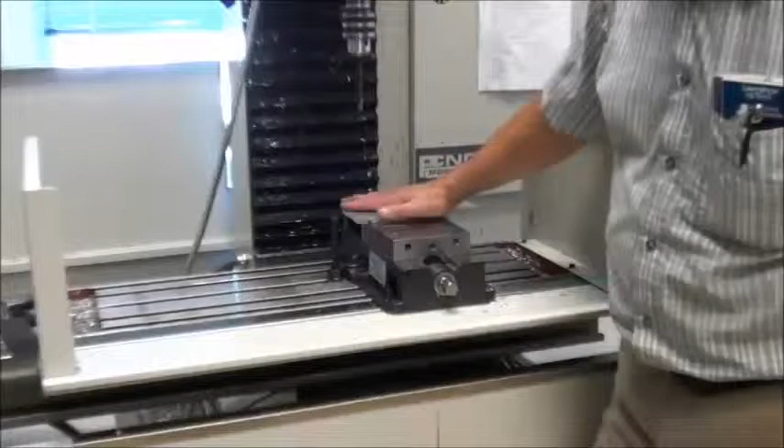So let's go through the zeroing process. First thing, I just got a drill here. I need to change that drill. So I'll show you how to change tools, and then once we have the appropriate tool in here, we'll show you how to zero that, and away we'll go. I'm going to bring this down just a bit for convenience.

Changing the tool, there's a latch on the side here. Unlatch it, open it up. This has a pair of flats, and there's this arm here that will engage those flats. That keeps it from turning. Now I can loosen up the lock rod. If I knew where the wrench was, there it is.

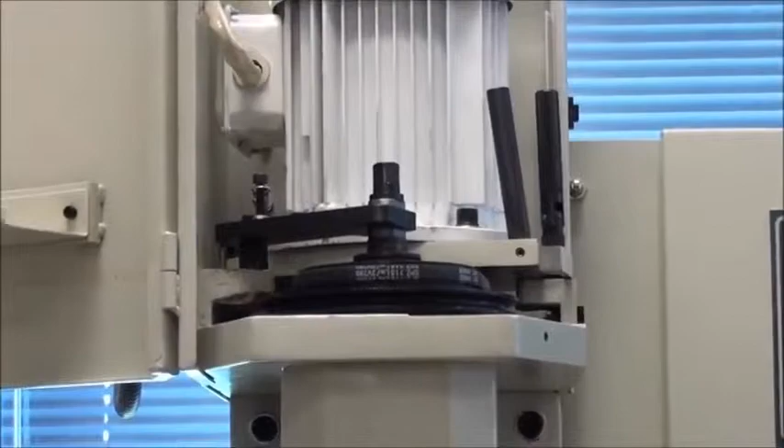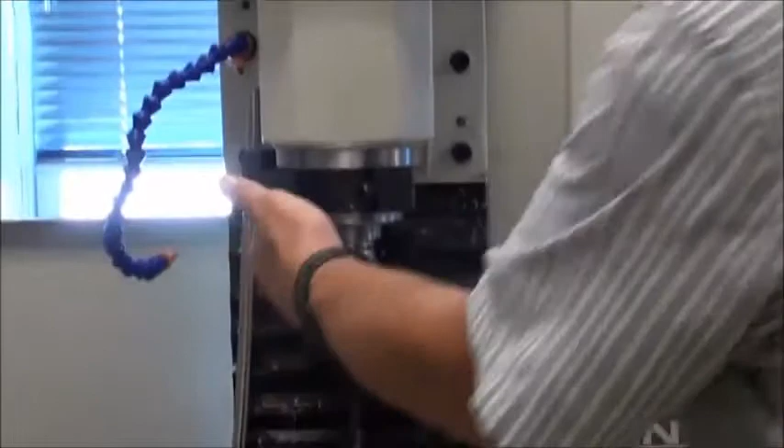One thing, when this comes loose, depending on how tight the last person tightened it, if it's not real tight, as soon as you loosen it this can fall out. When this falls out, it's going to land on something. You can chip the tool, you can dent my surface. Neither one is good. So one hand on this, the lock is engaged. I will loosen it up a bit.

Now in this case it's holding okay, so I will take my screwdriver, give it a tap, and I should have been holding it better because I bounced it off my aluminum there, but that's the way to get it out. Too busy talking and not thinking. Okay, so that's getting the tool out.

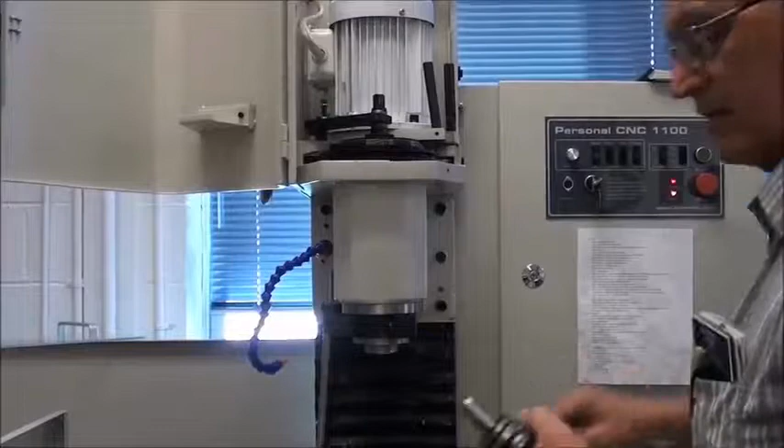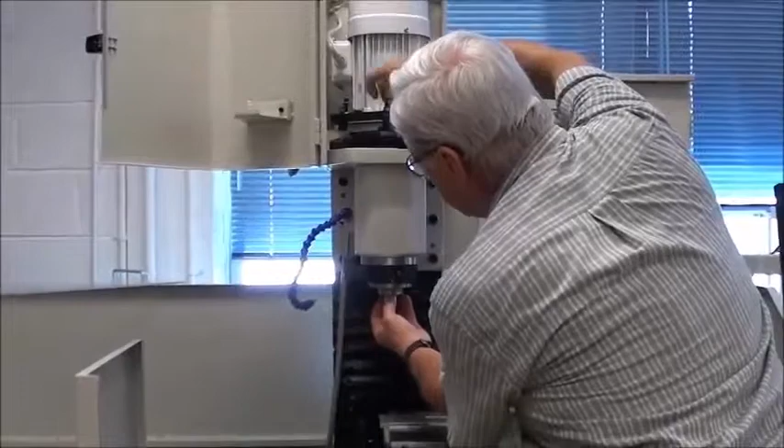And what this tool goes into, let me just open this up here, okay? I'll unscrew this. There is a collet in here. And the collet has a taper, and as you draw that in through this threaded hole right there, when you tighten that nut on the top, it compresses that collet and squeezes in on the tool, whatever tool it is.

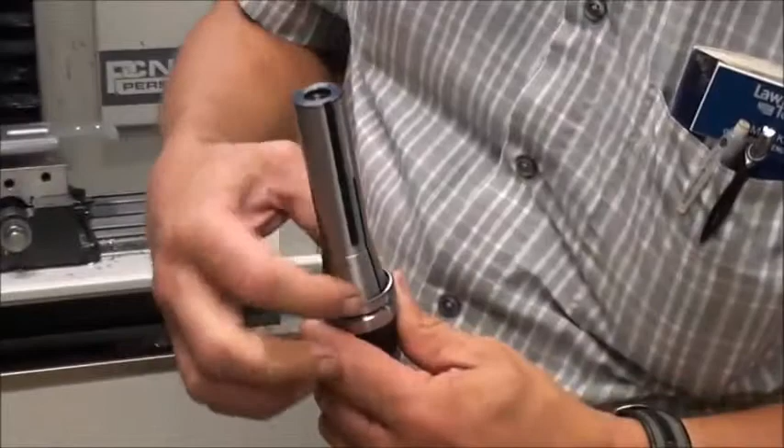And for these tools, the tool just slides in there. It's got a surface here that will butt against the bottom of the spindle, so I know the precision location. So that holds the tools. Another way to put tools in here would be to use the appropriate collet with the right size hole for the particular tool. And there's an assortment of collets around that we can do that with.

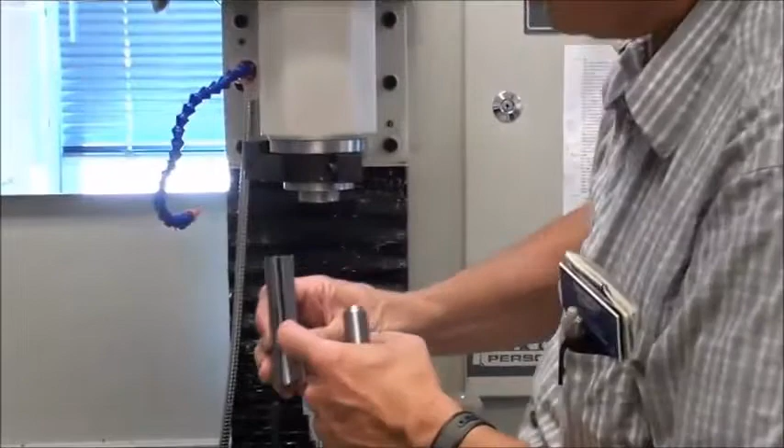And this also has slots so it doesn't turn. So as I put it up in here, I'll spin around, find that slot, I can push it up, tighten the nut, but I can take my tool, it goes in, I hold it up tight, tighten this down, it's good and tight. Now the tool is locked into position.

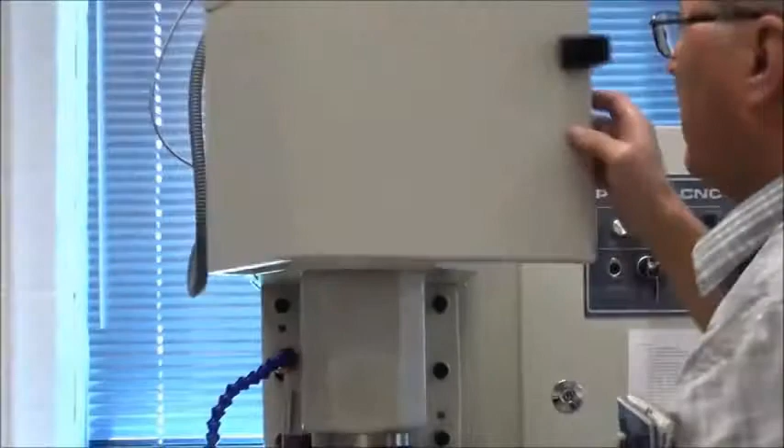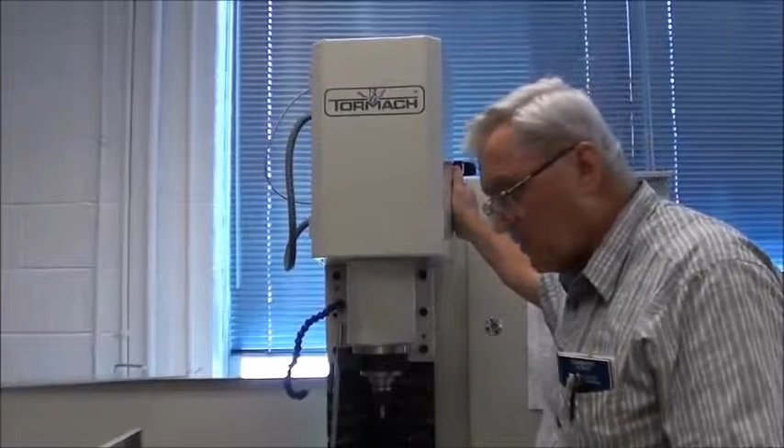I can flip this out of the, well, if I fail to flip that out of the way, when I go to close it, it doesn't close properly. If you get to that point, don't force it, right? Something's wrong. If something isn't working, stop and think. So what we need to do is just move that out of the way. Now it closes nicely. Here, I can latch that, okay?

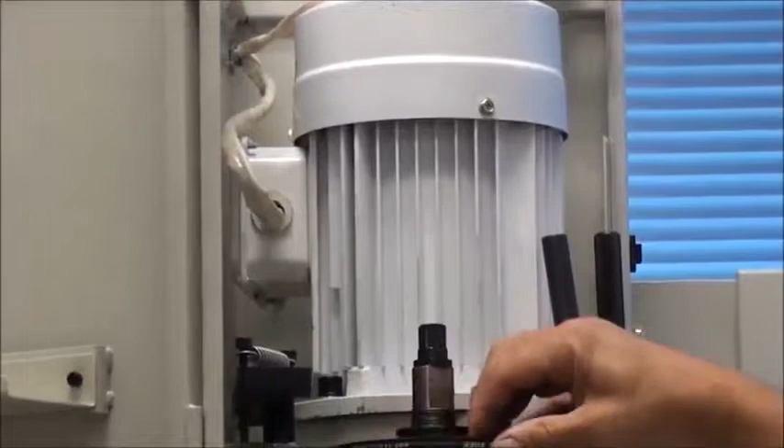One thing while I have this open. There are two pulleys here, and there's a sticker up here which you can't see in the camera now. There's a high-speed range that runs with this up here. You command speeds from 250 to 5140 RPM. If I need to change it, I can flip this lever down, flip that down, loosen that bolt. I got slack on the pulley.

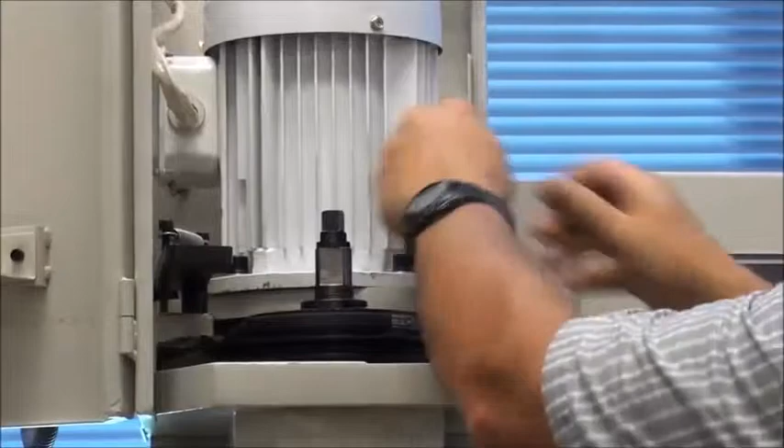I can put the belt on the other set of pulleys, and it's easier without a wrench in my hand. Tighten it up, tighten that up, and that would put me in the low speed range, which runs from 100 to 2,000 RPM, but for now I'm going to leave it in the high speed range. Turn things the right way and flip those handles up, and we're good. Okay.

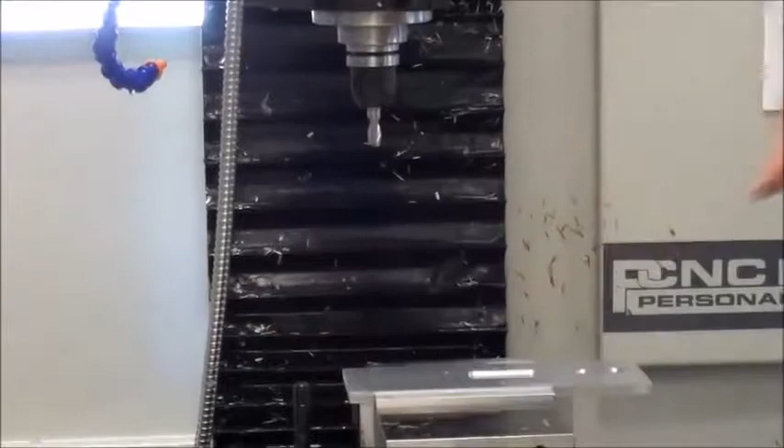So now I've got the tool that I need. The machine is referenced, so the machine knows where it is. What I need to do now is find where this part is in reference to the machine. So I've measured the diameter of my cutter here. And if I move it down so it's just touching the edge, I know that the axis of the spindle is 1/2 cutter diameter away from this edge. And then I know where the edge is. Okay? And we're not going to just jam it into the edge.

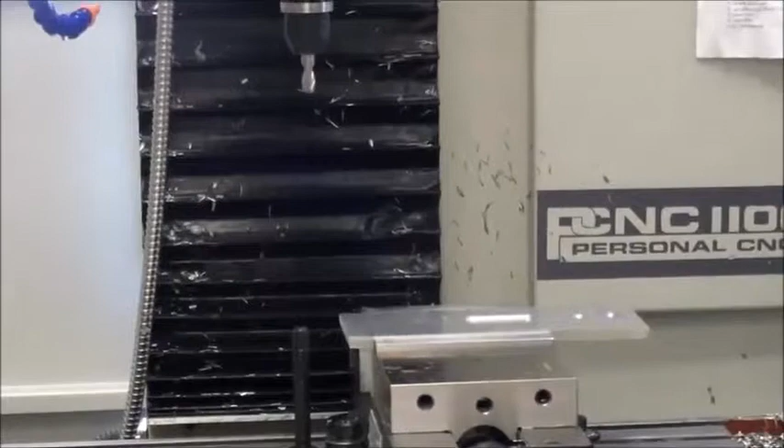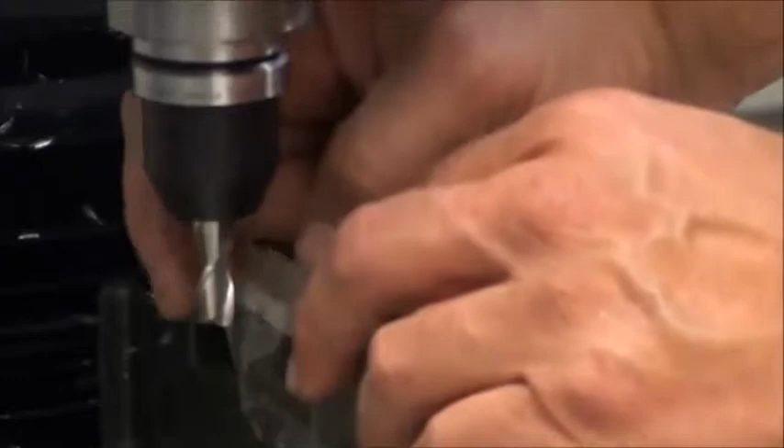Helps if I go the right way. Come over near the corner where I want to measure, and I'm going to take a Lifesavers wrapper because I happen to know that this is 1/1000th of an inch thick, and I can put it in here as a feeler gauge, and then when this gets close enough to touch, I'll be able to feel that as I wiggle this, and that'll tell me that I'm 1/1000th away from touching.

So I can move this fairly quickly in to get close. Now that I'm close, I'm going to use my pendant here and I'm going to click on the X button, set in the X direction. I'm going to move it slowly, slowly, slowly. Now I'm getting real close. Now I'm going to use the jogger, just move it one step at a time. You can hear it clicking. Each one of those steps is 1/2 thousandths.

And I'm wiggling the cellophane, and at some point you should get, it's touching. I can feel the drag. If I go one more step, 2 more steps. Well, now it stays there by itself, I think. Barely.

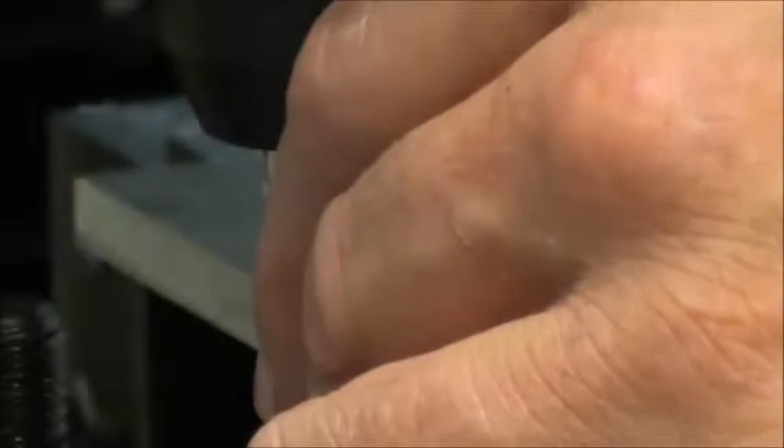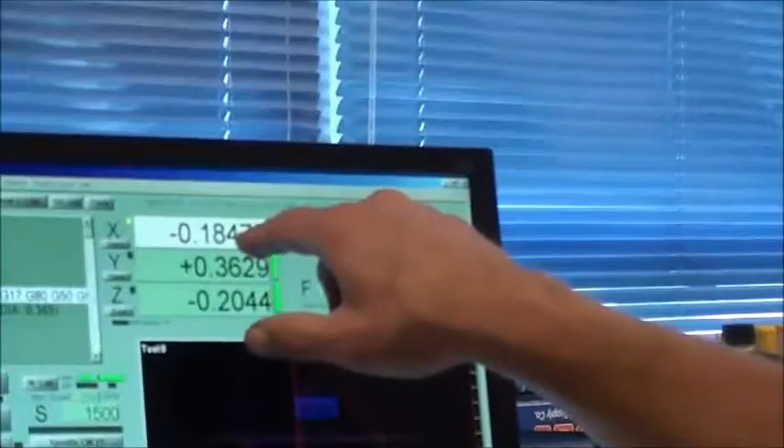There it is. Okay. It's now just tight. I can't get it back in here. Okay. So that was just touching. So now this cutter is 1/1000th of an inch away from that surface. The diameter of my cutter is 0.1875, and I just highlighted this readout here, and I'll hit enter, and now it's set that as a position of the cutter in the x-axis.

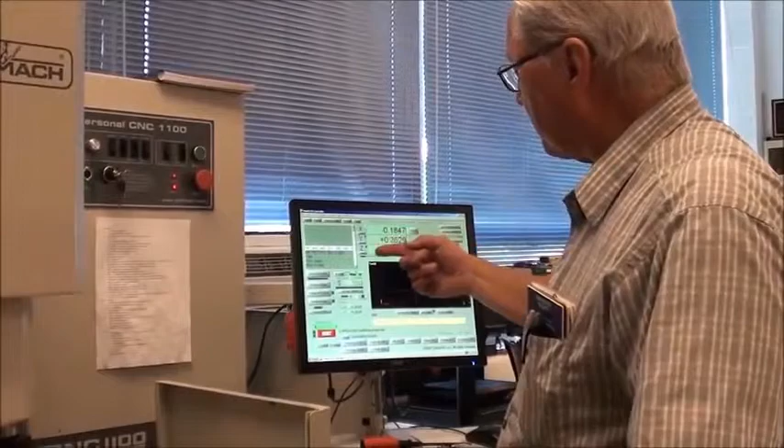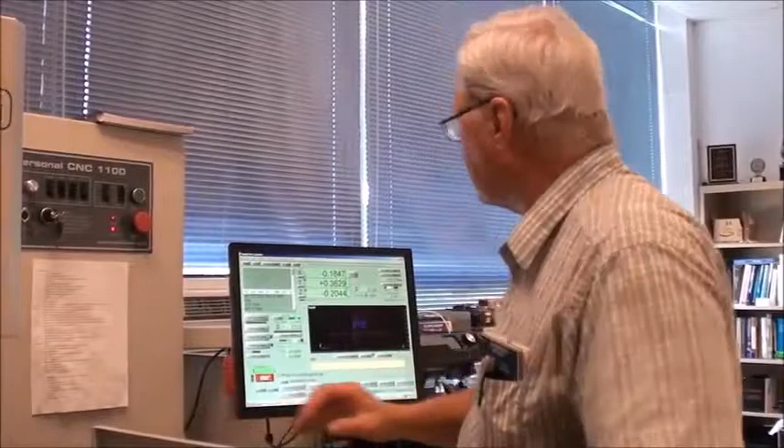Okay, these fields here on the screen tell me the position x-axis, y-axis, z-axis, and they're relative to wherever I've set an offset. These are called digital readouts. Back in the olden days when you didn't use a computer screen, well, not the olden days, the medium days, you would have digital readouts up above your machine. In the olden days, everything was done with graduations on a dial, but people still refer to these as digital readouts or DROs. If you read the manual for this, they'll use the abbreviation DRO everywhere, and it just means digital readout, and it just really means a field on this screen that you can type something in.

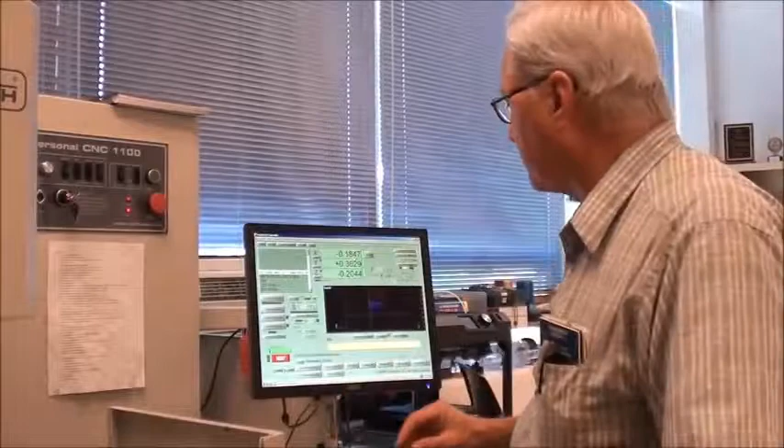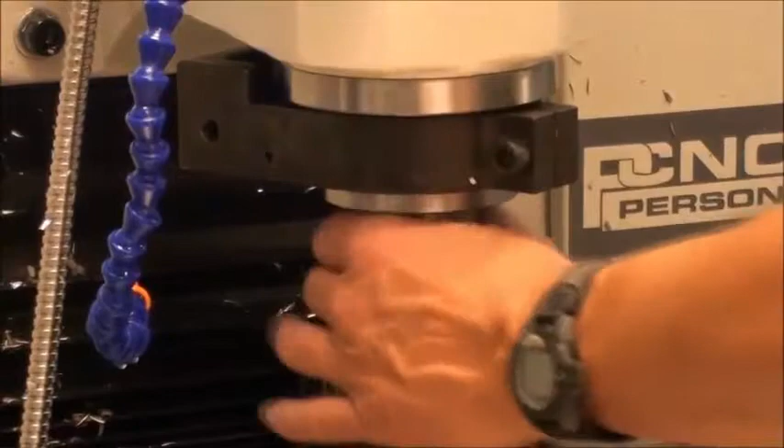So anyhow, I know where I am in the X. I'm going to go up to clear my part. Now I can find Y using a very similar process. I'll move this over. Back down. And I want to make sure that I've got this turned so that I'm feeling the edge of the flute and not in a valley. Put my cellophane in there. I move it in fairly quickly, start, and then I'll move it slowly with the pendant.

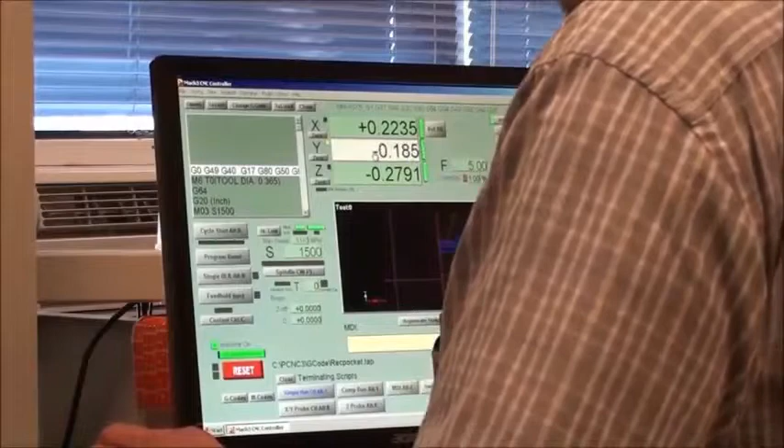I'm getting close. Okay, now it's tight. I just touched. So I'm going to back it out a little bit. If I touch it going slowly, we're okay. If I bring it into the part going full speed, I'm damaging things, and that's not what I want to do. So I'm going to step it in here, and there it is. It's just now tight. So that is minus 0.185, right? to add that 1/1000th for the cellophane.

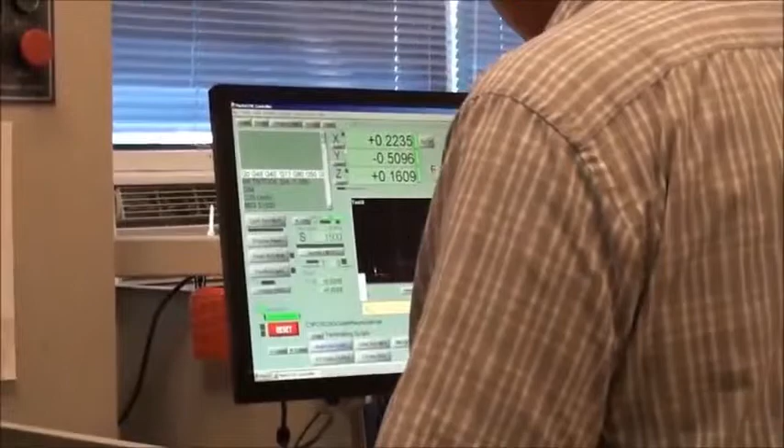Enter. And I forgot to do that extra thousandth when I was on the other axis, but that's not important because it's just a random piece of scrap and we're just putting a hole in a random place, okay? So now I've got the part mounted into the machine, it's mounted flat, it's mounted square. I found this corner. If I bring the page up so it clears, I can type commands in here. I want to X0, Y0, send it to the 0, 0 position, and it's moving at whatever the last feed rate we used for anything was, and we'll talk about that in a minute.

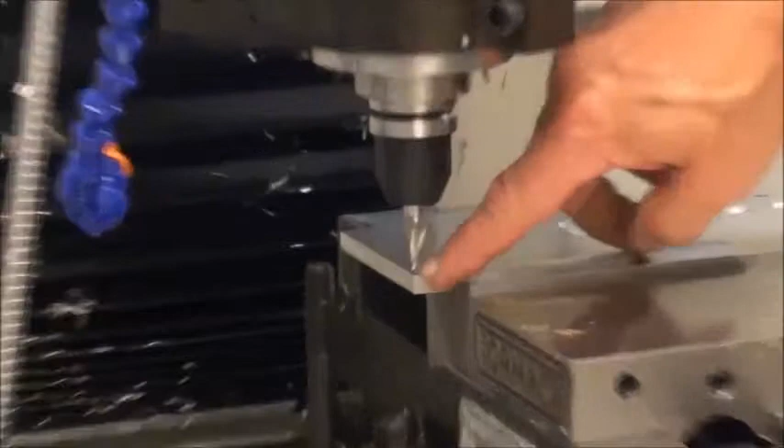So the center of this cutter should be exactly centered on that corner, okay? And it looks pretty close. It's always a good double check. If I knew the exact dimensions of my piece of metal, I could go back to this side over here. Hang on. And I could bring it down and touch it off using the same process, and I could compare the result from moving it over with my known part dimension and know that I didn't goof up the first time. That's a good double check, okay?

One more dimension to set. Let me give myself a little clearance. I can move it over. Too far. I need to set the height. I could do the same thing with the cellophane, okay? But this cutter is sharp. See that Band-Aid? That cutter is sharp. That's the reason there's a Band-Aid there. It tears the cellophane. It doesn't work as well. So what I'll use is something that has a known diameter, like this rod.

And if I can roll it underneath freely, I know I'm above that diameter from the part. If I go down, and I don't roll it while this is going down because I don't want to jam it down onto that part. Okay, now this doesn't roll underneath, okay? So I know I've gone too far down for that distance. I can use my pendant, click on the Z, I'll send it in the plus direction till this rolls.

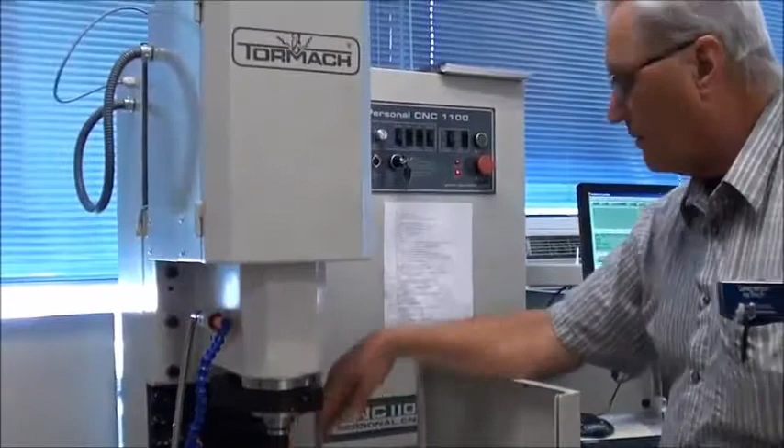The thing is, because this is a stepper motor and not a commanded thing, every time I click it, it does a command, but any backlash or hysteresis in the ball screw mechanism means there's lost motion. So that was going up. Let me go one more up. Okay, so now I can just go underneath. I can click it down one, and it still goes underneath just about the same.

Another one, another one. So there's just a couple, like a thousandth or less of hysteresis. But the bottom line is I like to find this touching point as I'm moving down, so if there is any hysteresis in this, it's accounted for, because when I'm drilling, I'm going to be going down. I can just feel it, just nicking as it goes past.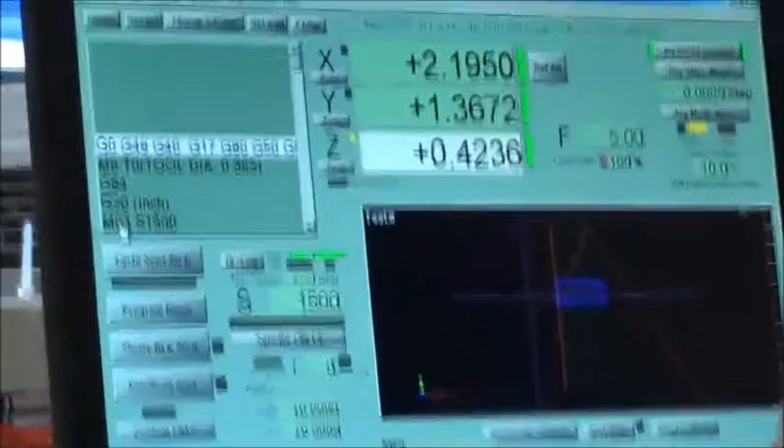So what I will type into the z-axis here is the full diameter of this, obviously. That is 0.4236. Enter, and I don't have any cellophane, so I don't have to allow for anything like that. So now I know where my part is in the X direction, the Y direction, and the Z direction, and now we're actually to a point we can start thinking about making chips.

Okay? You ready? 3, 2, 1, go.

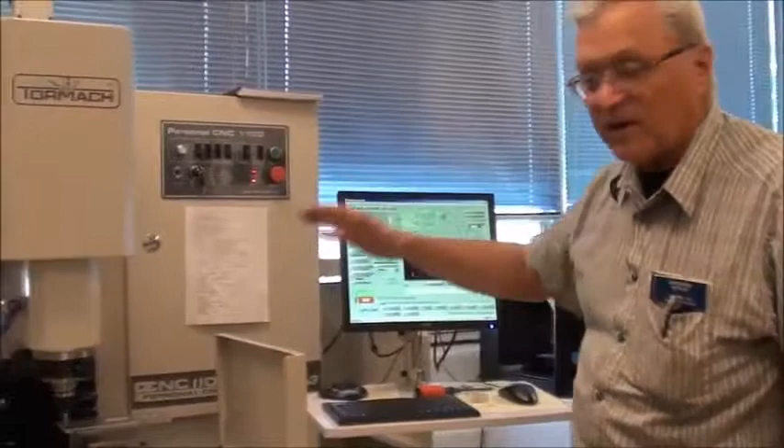Okay, welcome back. So at this point we've talked a little bit about safety. I will remind you there's no more important safety device than what you got between your ears. You got something there, let's use it. If something doesn't feel safe, then it's probably not, so don't do it.

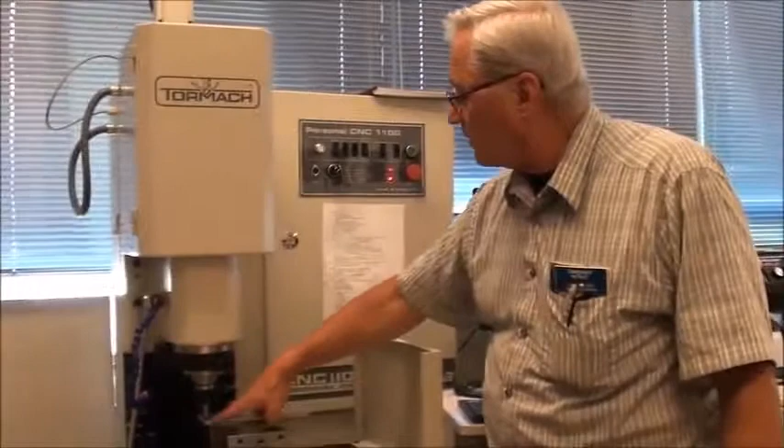We've got the part in the machine, we've got the machine zeroed, we know where our corner is, we've found our axes. I've got this very corner of the part set to be 0, 0, 0 in terms of the top corner there. So given all that, we're actually in a position we can start thinking about making a part. So what are we going to do? Well, there's a lot of different ways we can do this.

We can move the machine manually, just like I was using with the keyboard and the pendant, and machine things manually. We can draw a part in SolidWorks or AutoCAD or CATIA or anything like that and come up with a surface drawing, and then we can put it in a tool like EdgeCam. EdgeCam will create the tool paths around that surface that we need and finally create the code that we need for this machine here.

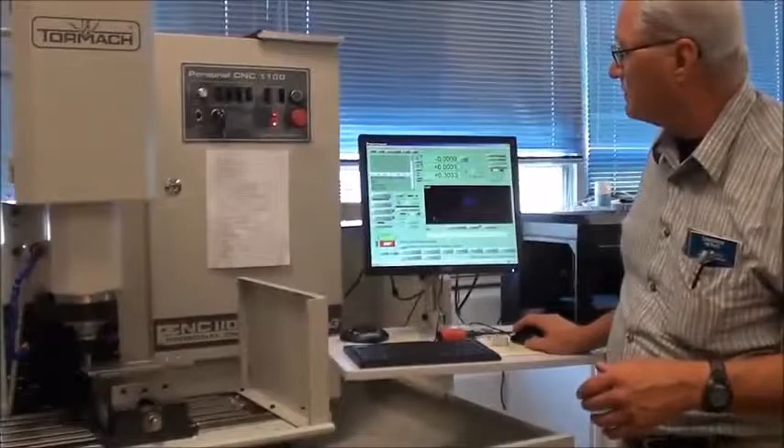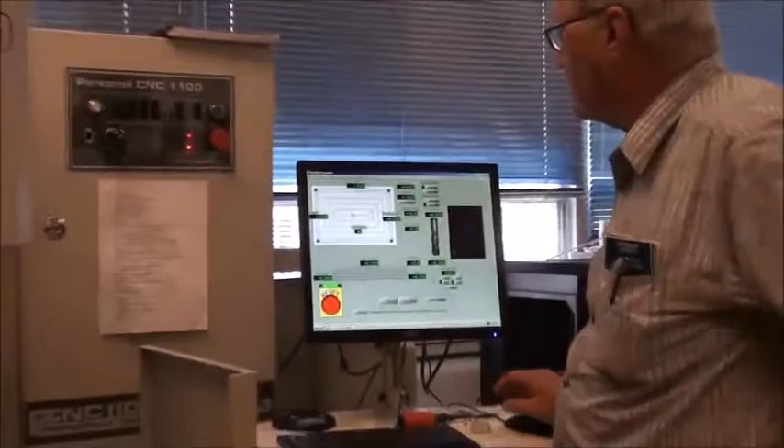Or for this example, since we're just kind of showing you how things work, this machine does have a lot of what they call wizards. I click wizards, pick wizard, and I'm going to go down here to rectangular pocket. So basically it's just a recessed pocket, rectangular in shape. And I can specify a number of things here. Let's walk through them. I got a width and a length. The width is in the y-axis, front to back. Here it's 1 inch. Length is 2 inches.

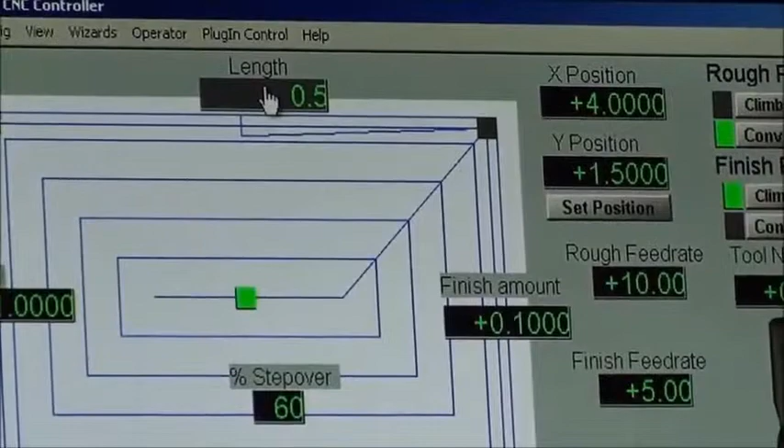I could make this 2.5 inches. Let me retype that. 2.5. And I have to hit enter for it to stick. If I just type it and move on, it doesn't stick in these things. So now I'm going to create a pocket 1 inch by 2.5 inches.

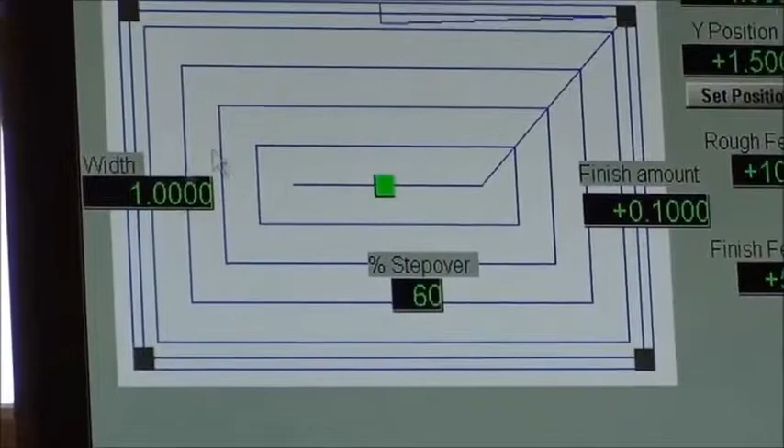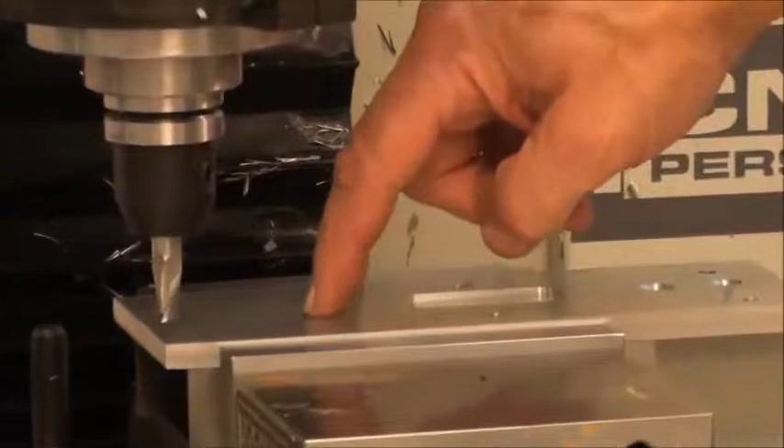The position of this pocket, I've got an X and a Y position for the center of the pocket. I can put the X position at 3 inches, and now the center of that pocket is going to be 3 inches over from this edge. In the Y direction I have it at 1.5, so it's going to center that pocket about the point 3 inches in the X, 1.5 in the Y from that very corner. Those are here and here.

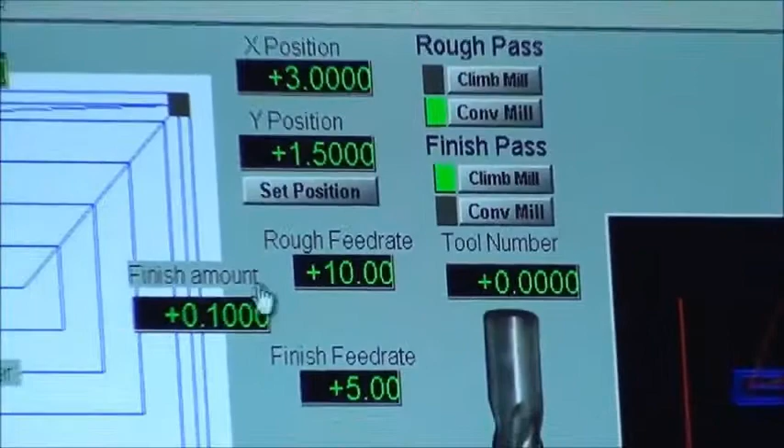I've got a rough feed rate. Because we're in inch units, it's in inches per minute. It's set at 10 inches per minute, which is okay for aluminum. And I don't like to push this machine too hard. Finish amount is 0.1, so it will get within 1/10 of an inch and then make another pass to do a finish pass at a finish feed rate of 5 inches per minute. So it'll rough it out quickly, then slow down and finish it off slowly at 5 inches per minute.

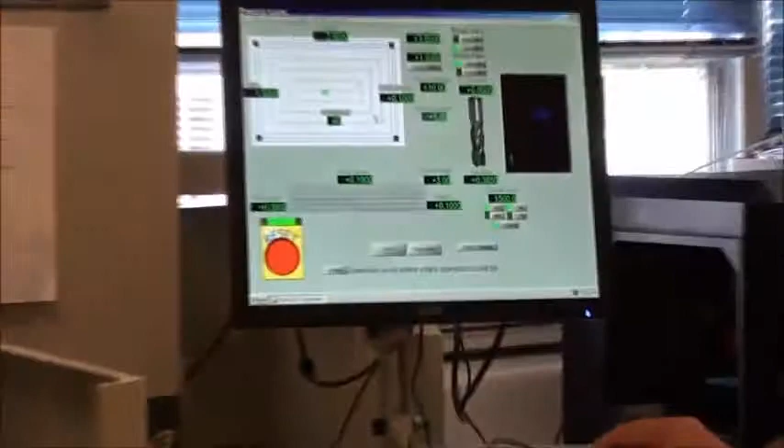Percent step over. If this is my cutter and I make a pass, I'll cut a slot this wide, right? And then if I move it over 100%, I'm going to cut a slot right next to it. If I move it over 50%, the cutter will be overlapping by half. So you want some overlapping so you don't potentially get a ridge or something. Here it's set at 60%. We'll live with that.

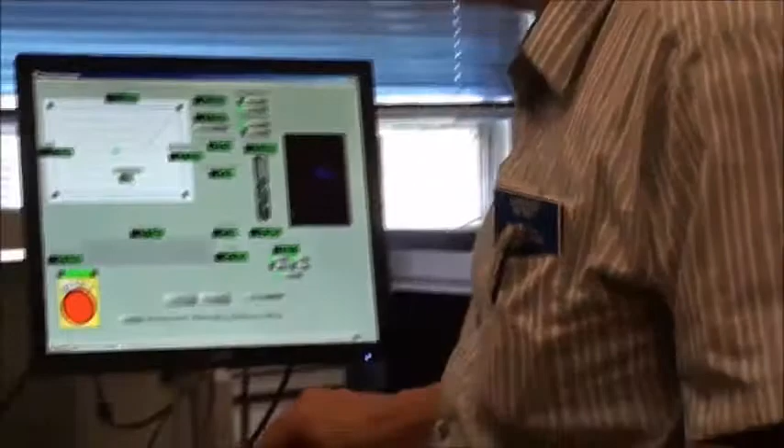Rapid height. What is a rapid height? There are times when this machine is going to move quickly in an XY direction, and we want the cutter to be clear of the surface so it doesn't impact anything. Here it's set to 1/10 of an inch. So looking over here at the part, before it moves quickly, it'll raise the cutter 1/10 of an inch above our Z plane, which is the top surface, move quickly, and then go down. And that's safe because this is a flat piece.

Let's suppose instead I had a part held down with a toe clamp, okay? And I drilled a hole here, and I want to move over there, a toe clamp back here. If I raise the cutter 1/10 of an inch and rapidly traverse across my part, I'm going to crash into the clamp. Okay? So if I've got clamps and things going on, I have to have that safe Z height up above the thickness of this toe clamp. You want it up a good inch or so, maybe even 1.5 inches, so that it comes up, clears everything, and then goes back down. Okay? So be aware of obstacles and things going on in your mounting that you could crash into with the cutter.

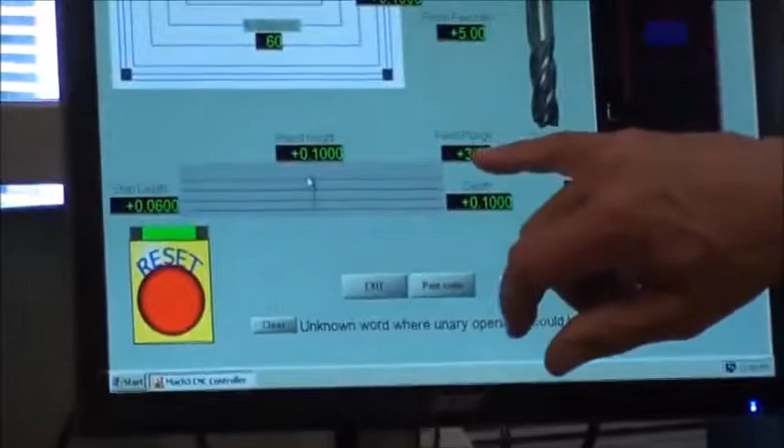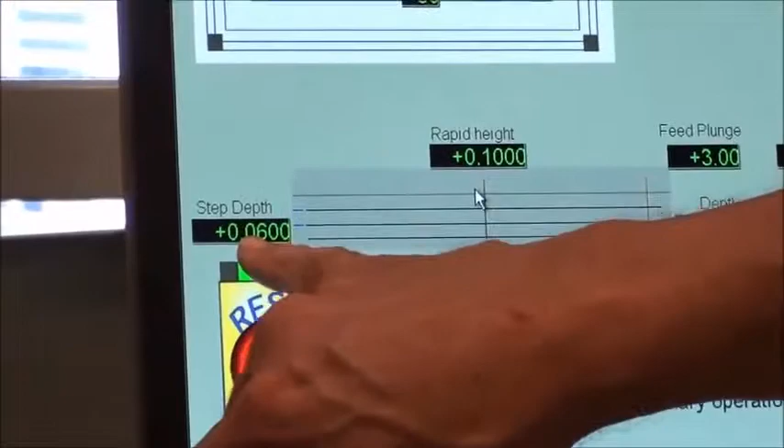Other things on the screen. Feed plunge, that's 3 inches per minute. That's how fast the cutter is going to go down into the material. It's going to go down a step depth of 0.06 inches or 60 thousandths of an inch each time it goes down. It's going to go down another 60 thousandths. The total depth of this pocket is 100 thousandths or 1/10 of an inch. I'm setting my spindle speed at 1500 RPM. Inches are units. It's spinning clockwise.

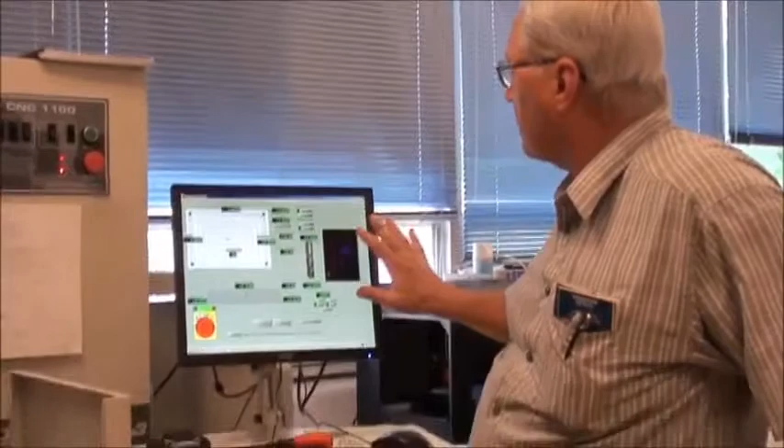And here I'm turning the coolant on, because when I'm machining aluminum, I like to have the coolant going because cutters tend to clog up, and with the coolant it flushes the chips away and keeps the cutter from clogging up. So that's all the parameters I've set.

One more up here, there's climb mill and conventional mill. Imagine, and it's probably easier to imagine this way, if my cutter is turning this way, if I'm machining along like this, the cutter wants to climb up on top of my surface, okay? It's going to kind of pull the cutter into the material or pull the material under the cutter. I don't know if my fat fingers are in the way. I'll do it this way. So if I'm turning this way, this is climb milling where it's pulling into the surface. Conventional milling, your cutter's rotating this way and you have to push the cutter into the material and it's less likely to grab and pull. So typically we prefer to do conventional milling as opposed to climb milling just because you're less likely to grab and pull the material in.

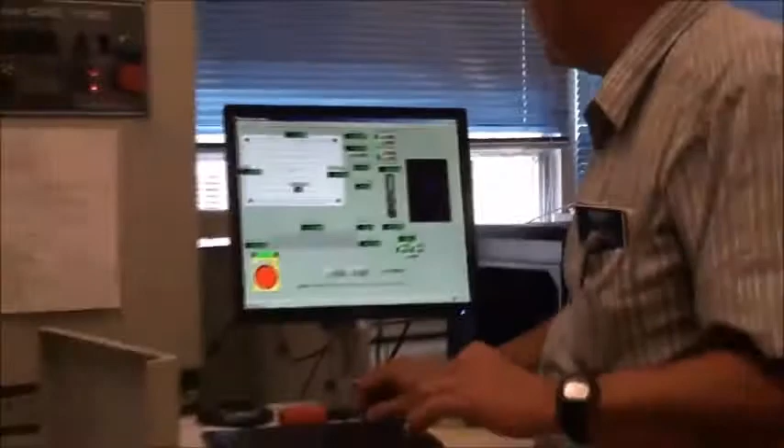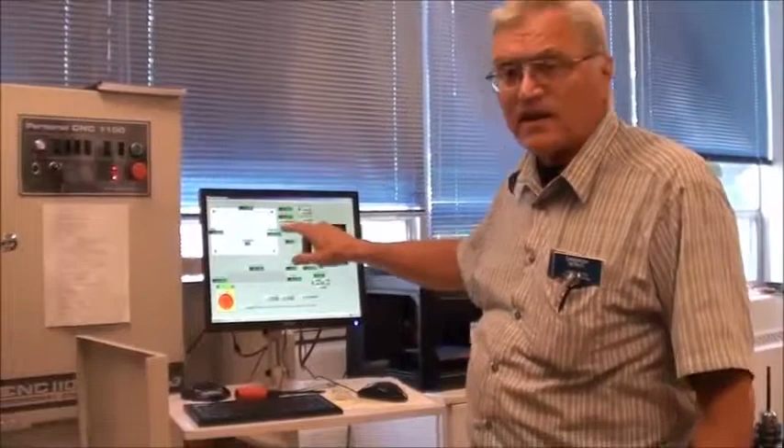That's everything on this wizard. There's a whole bunch of different wizards in the machine. They're all different, and the terminology is different. They're written by different people. So just make sure you understand what every single entry is on here. Don't say, well, I don't understand it, it's not important, because you may find that in fact rapid height, what's that, who cares? Well, the default is fine, but had there been toe clamps in the way, you would have been breaking bits. So we post the code. We have the option to save the settings so that we come back to the same thing next time. We don't need to. Exit.

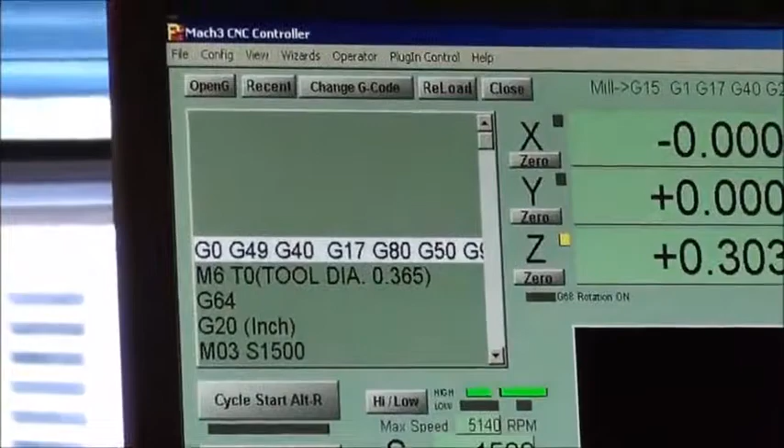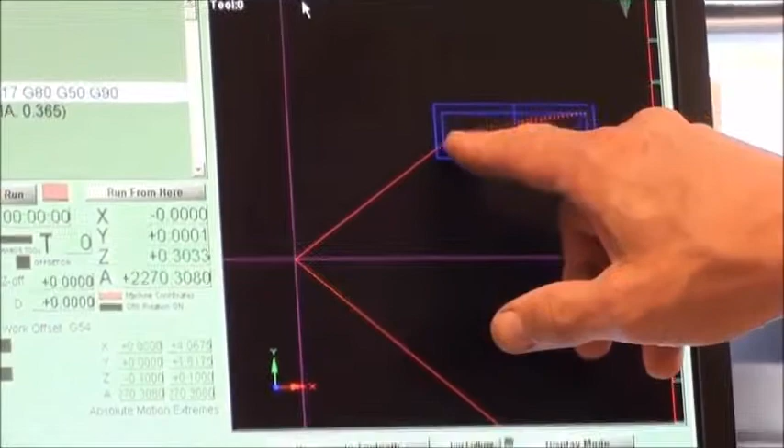And we now have code in our window here, and we'll get to that in a minute. And I also have a drawing here, the dark blue. I don't know if you can really see it. Let me go to a different window. Go to the toolpath window. It blows it up a little bit. But this shows the position of our cutter right now is at 0, 0, and the path it's going to take to get to the start of the cut, and then the cutting path it's going to take as it goes around and around.

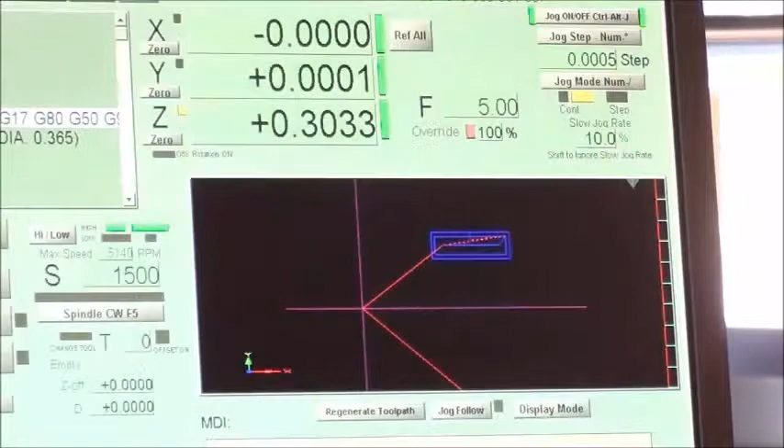And I can take this drawing and I can rotate it to look at it from different angles. And if I get to this angle, it's probably almost impossible to see on the video, but you can see the different depths. So I can play with that, look at the tool paths. Okay? Most of the time I just use the simple run screen right here. So there's the paths that the tool is going to take, and here's the code.

If this is the first time you've run this wizard, or the first time you've gotten code from somebody, there's a lot of things that can go wrong in this code. So we've got some code that's been created, and we're going to take a look at it because sometimes you really do need to look at this code. So if I click on Gcode, change Gcode, it brings it up in a text editor.

And the Gcode or NC code or G codes or whatever you want to call it, this stuff has been around since the late 50s, early 60s. So it's not your nice, object-oriented, fancy stuff. It's pretty primitive stuff that was originally written for pretty primitive processors, and basically it's just a set of alphanumeric codes. Each code translates to a specific machine action.

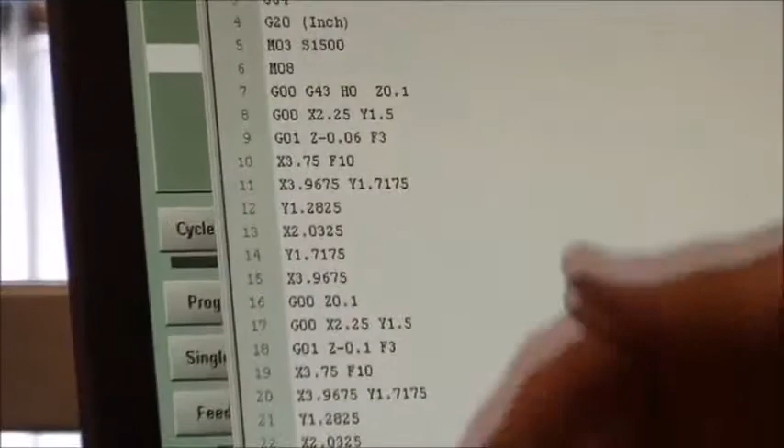For example, G0 means a rapid traverse. G1 means you're going to do a traverse at a fixed feed rate. Every time you move the cutter, you don't want to have to keep typing in the same feed rate over and over. You don't want to have to type G1 every single time. It'd be nice just to be able to type in the coordinates and have it go there. So the way this code works is once you type something in, like a G0, a G1, to move fast, move slow, every movement is going to move at that previously specified rate.

Every time you put in a command to tell it to do something, it doesn't forget those commands and they stay in place. So considering that the last person who used this machine could have commanded things like put it in metric mode or commanded real high movement rates or something, the first thing we do in our Gcode is a safety block.

And I don't know how close you want to zoom in. Can you? Okay. This is great here. I've actually got a person operating the camera. I should make you come around and say hi. It'll only be half as boring.

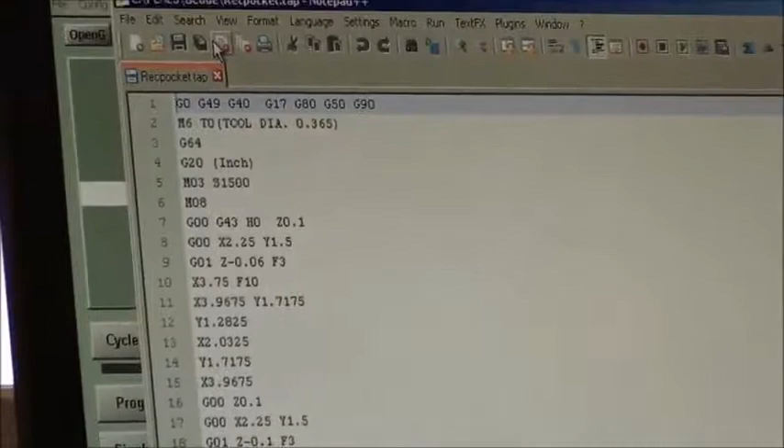Each of these codes is basically to get things set up and undo things that previous people might have done. So you've got a G0, so initially any movement we make is going to be fast. A G49 turns off any tool offsets that might have been applied. A G40 turns off any cutter radius compensation that somebody might have applied in a previous program. G17 is selecting the normal XY plane. G80, what is G80? Oh, canned cycle. Yes, that's an important one.

Let's talk about canned cycles for just a moment. If I'm drilling a series of holes in a plate, suppose I want to do what's called a peck cycle. In a peck cycle, you drill down, you pull it out to clear chips, you drill down a little further, you pull it out to clear chips, drill down, pull out. If I had to program that cycle manually, it'd take a lot of steps, a lot of codes, each movement down, each movement up at a different rate, up, down, up, down.

But they provided for what they call canned cycles, where I can just tell it I have a peck cycle, I've got a final depth, I've got the clearance that I want to pull out to after each pull out and things like that. And once I turn that canned cycle on, every time the part moves to a point, it just sits there and does the drill. It moves, drills the hole, moves, drills the hole. So I can drill a dozen holes without having to keep repeating the same Gcode over and over. I have this canned cycle active, so I just have it move to a point and it all happens automatically.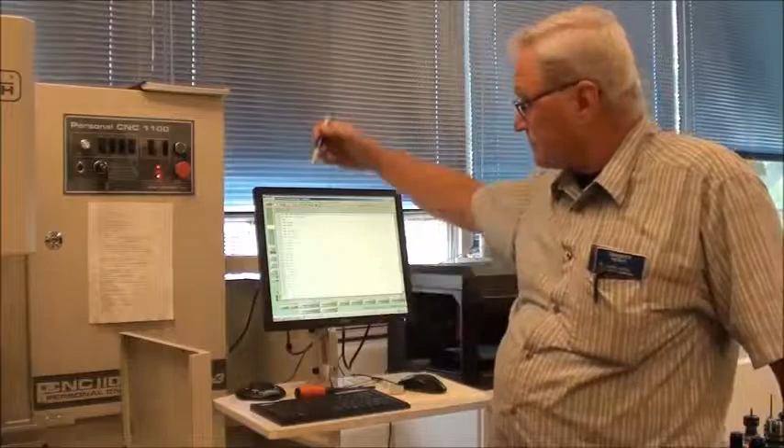Well, if the previous person who was using the machine had a canned cycle active, when I go to do my pocket, I'm going to tell it to move to some XY point, and if the canned cycle was still active, it'd try to jam that cutter down like it was a drill and drill a hole. We don't want that. So G80 turns off that canned cycle. G50 turns off any scale factors. I could apply a scale factor to stretch and distort my part if I want, but normally I don't, so we turn that off.

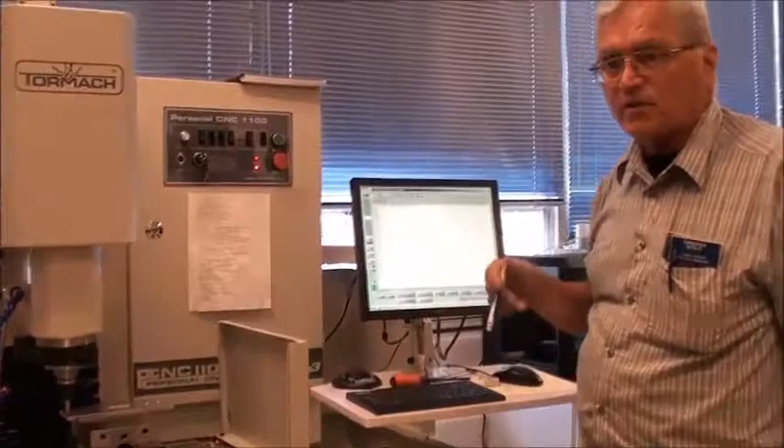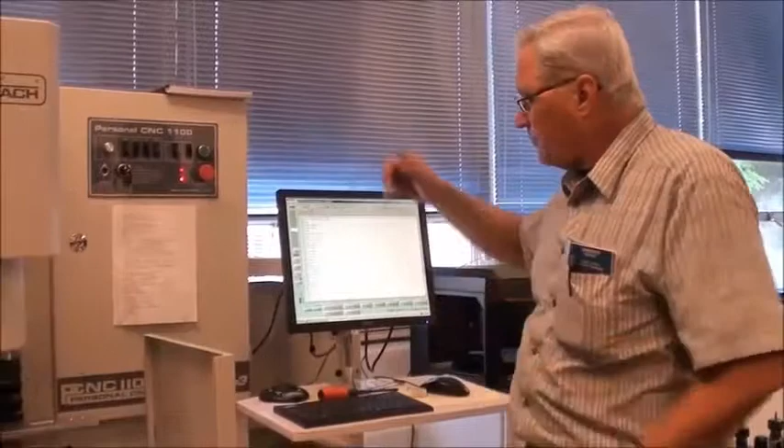G90, what was G90? Oh, G90 says you're in the absolute mode in terms of positioning. There's absolute and incremental mode. In absolute mode, I tell it to go to 3, 3, which will be 3 X, 3 Y from my 0 point that I set. In incremental mode, I could tell it to move X a tenth of an inch, Y a tenth of an inch, X a tenth, and things like that, where I'm making an incremental move from wherever I happen to be. But this code is written in absolute mode, so we set it to absolute mode.

Next line, M6 is a spindle command. No, M6 is tool change, I'm sorry. Yes, M6 is tool change, so it's saying change to tool 0, T0. I don't have an automatic tool changer on this machine at the moment, so basically it's going to stop the program and say, put tool 0 in.

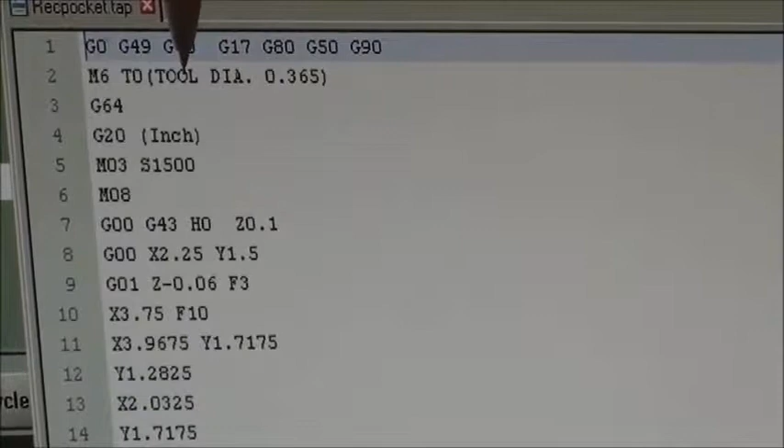And the stuff here in parentheses are comments. For this auto-generated code, there's not a lot of comments. If you're ever writing G-code on your own, please be liberal with the comments. It makes life so much simpler. Next line, G64. I don't remember what that one is. It's constant velocity mode, that's just the way the machine moves, versus stopping at each corner and restarting.

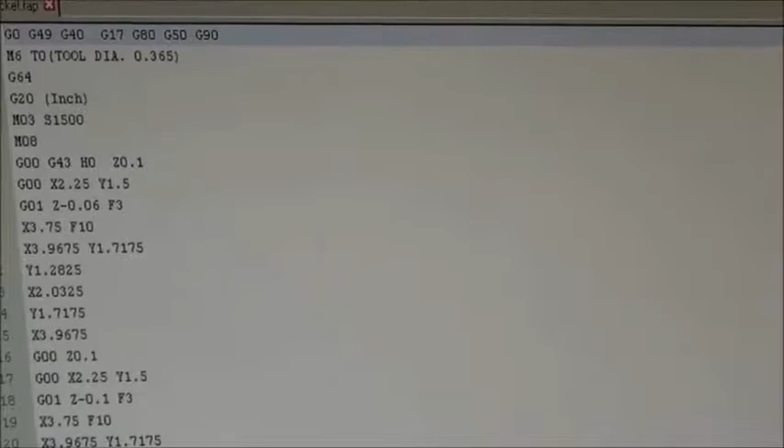G20 tells it it's in inch mode. G20 puts it in the normal inch mode. This is important, right? Let's say the previous person had been working in inches, and we wanted to do this in metric, we give it all metric dimensions. So I'm going to tell it to move 100 millimeters. Well, if the previous person had been in inch mode, the machine is going to interpret it as 100 inches, right? And it's just going to go charging off until it crashes into something.

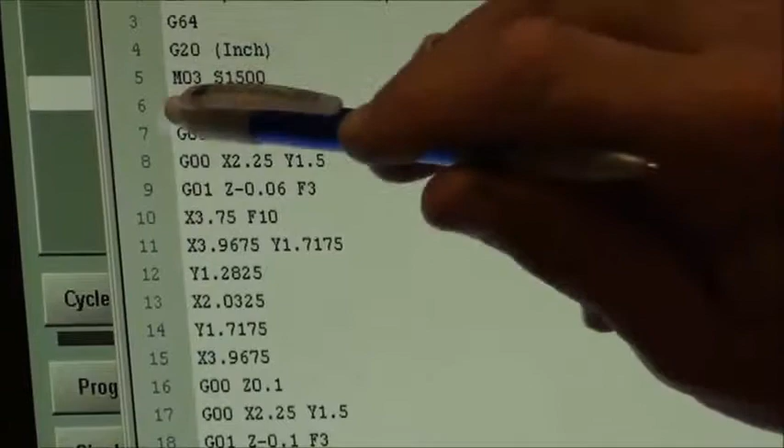So you need either the G20 or the G21 to make sure that you have it in the correct mode, inches or metric. Because again, it remembers from the last person. Once you tell it it's in inches mode, it stays in inches mode until told otherwise. M3 is a spindle command. It's telling it to run the spindle at 1500 RPM. M8 turns the coolant on. G00, or G0, does the same thing, is a rapid movement.

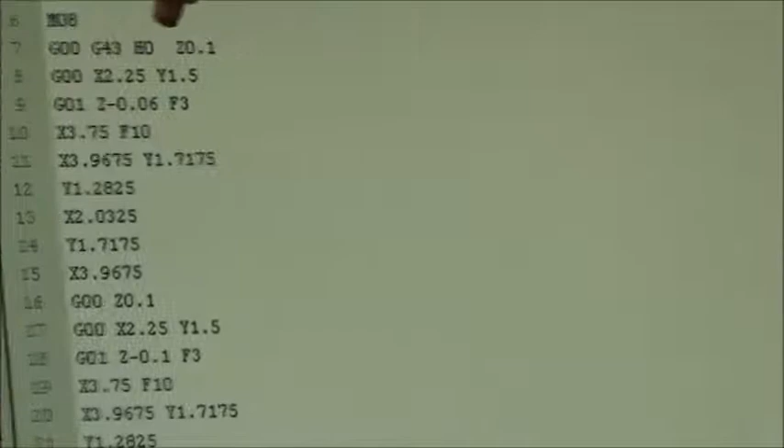G43 applies any tool length offsets that may exist for the tools. The H is the tool offset, it's 0, so we're just applying a tool offset of 0. And the Z0.1 is basically we're setting the tool offset to 0 and rapidly moving to a height of plus 0.1 inches. So it's going to move till the cutter is 1/10 of an inch above my top plane reference surface.

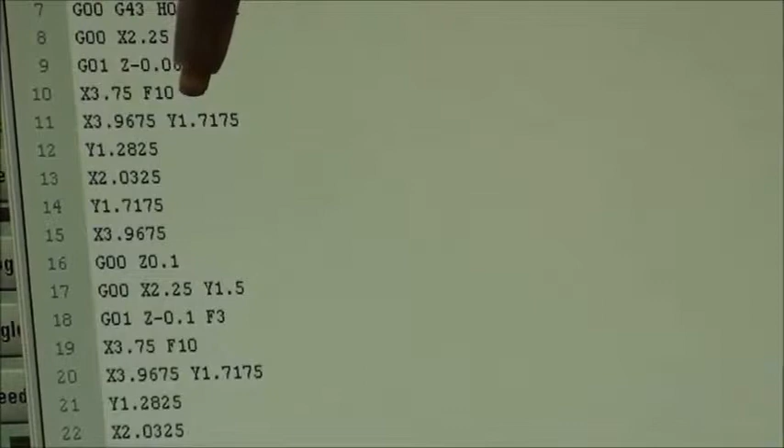G00 is going to move rapidly to X 2.25, Y 1.5, so it's going to move rapidly to approximately the middle of my pocket. And then it's going to do a G01, which is a linear move at a fixed feed rate. Z is going to go down minus 0.06 inches at F3, a feed rate of 3 inches per minute. And then it's going to move in the X direction to X 3.75 at a feed rate of 10, the F10, okay?

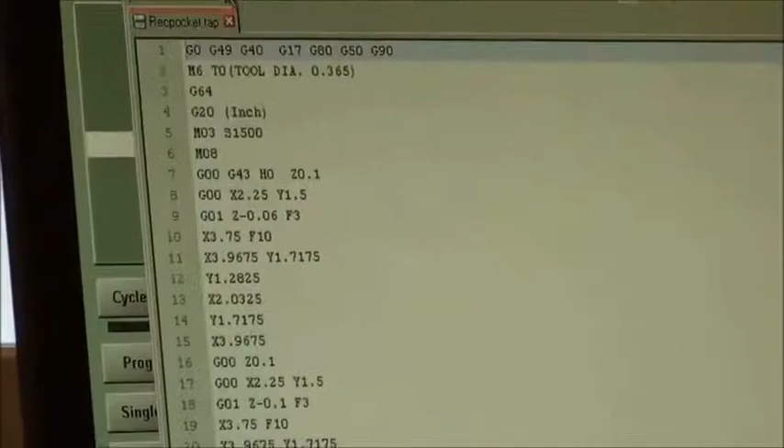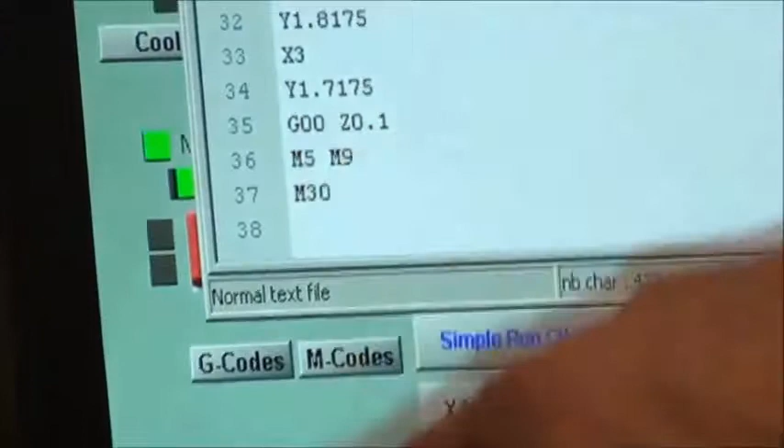If I saw X equals 10, that's off the edge of my part. That's crazy. Something went wrong. Okay, so you may just scan the magnitude of the numbers. You don't have to look at every single move. And then when we get down to the bottom, we see we got a rapid movement to plus 1/10 of an inch. M5 and M9 stop the spindle and shut off the coolant. M30 stops the program and rewinds it.

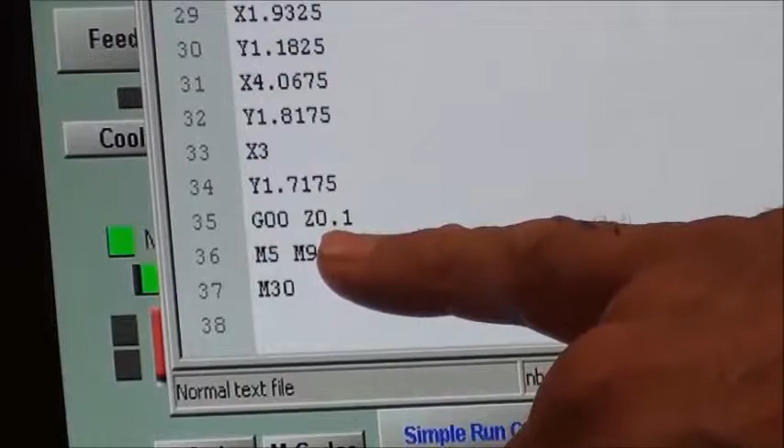It's worth looking at the very end. What I've seen in some programs is it will move to Z0, and then it'll command a rapid move back to XY 0,0 or to some XY coordinate. Well, if you're making that rapid traverse with Z set to 0, basically you're raking the tool across the top of your part, right? In this case, we machined out a pocket, so it wouldn't be touching, but in other parts, that's not necessarily the case. So make sure that you don't do some rapid XY movement without first retracting the spindle.

I won't say what program it was that had a tendency to do that, but it could very well have been an older version of Mastercam. That problem has since been fixed, but it's something that showed up regularly. Okay, so that's our whole code run through; it's worth the run through. Click OK, so there's the tools there. And now we're essentially ready to start making chips.

There are a lot of other factors in machining, and obviously I have not given you enough information to be an expert machinist, because I'm not an expert machinist myself. I'm an engineer and an edumacator, I hope. But I will give you the feel